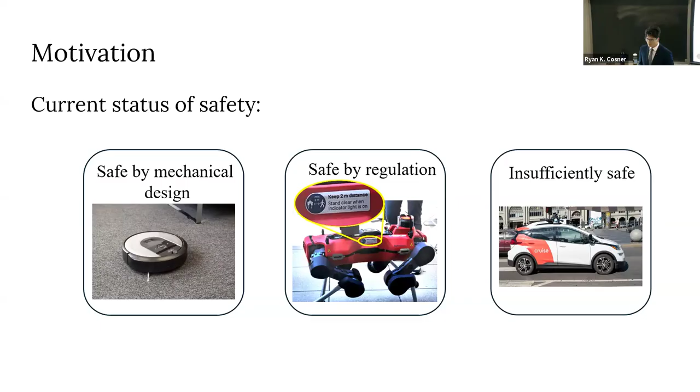These are our very performant robots, like our industrial robots. We don't see the robots building cars, they're behind fences in industrial manufacturing plants. So these are our two kind of ways industry has found to deploy robots at scale in a way that's safe. But this isn't necessarily what we want long term. I'd say these are kind of our training wheel approaches to achieve safety. It works, we get people on a bicycle, but they're not the full bicycle we ultimately want.

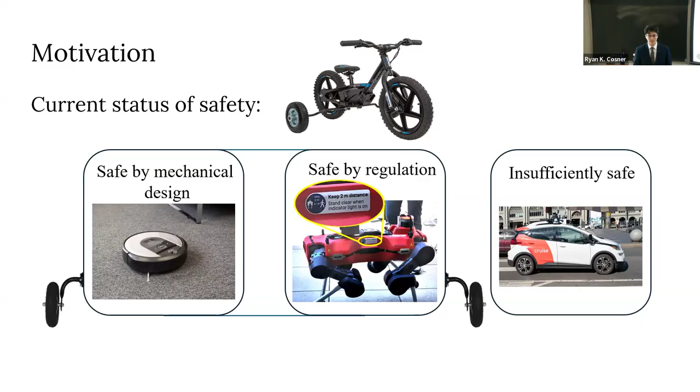The third category is the one we really don't want to be in, and these are systems that are insufficiently safe. The bar for safety obviously varies per system, and as an example, I'm going to focus on this autonomous vehicle scenario of Cruise. Cruise was an autonomous vehicle company deploying their robots, giving taxi rides in San Francisco, and they accidentally trapped a pedestrian under the car and dragged them across the street in a collision event. They were trying to be safe, pulled to the side of the road, but had trapped someone underneath the car and caused serious injury. Ultimately GM decided to shutter the company.

We really can't afford to have these things happen as we're deploying robots at scale. We hold robots to really high bars for safety. People get in car accidents all the time, but when an autonomous vehicle does it, because we hold robots to such a high bar, it can really affect the industry and general deployment. So we need to be really careful as we develop the performance of these systems to develop safety alongside it.

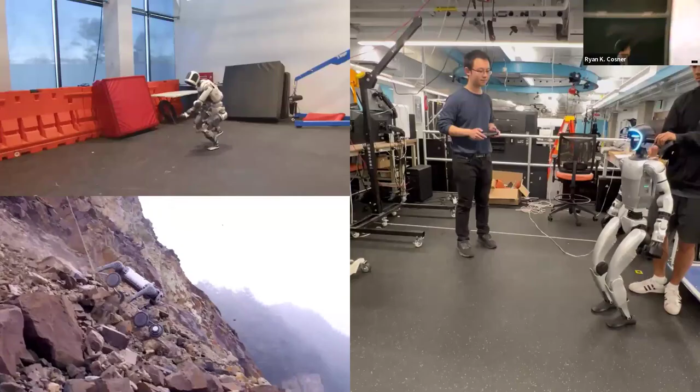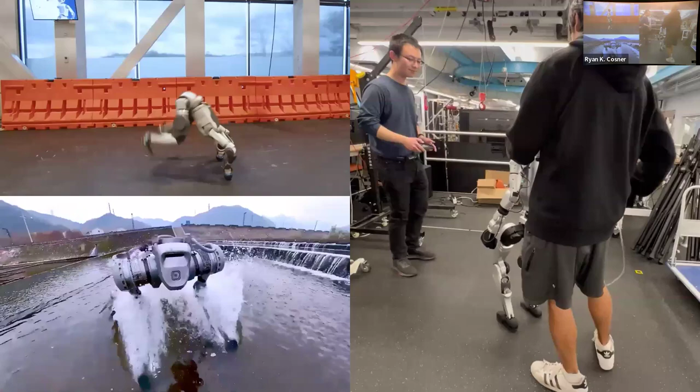Robot performance is going like crazy right now. Over the course of my PhD, we've developed some really insane capabilities in robotics. On the top left, this is Boston Dynamics and the AI Institute's new Atlas robot doing some pretty crazy dance moves. Bottom left, this is Unitree's quadruped doing some amazing locomotion with these wheel legs. And my favorite video of the three, on the right, this is Blake and Gary, who I believe are somewhere in the audience, members of the lab, who got this Unitree G1 humanoid on Friday and had it up and running like this on Sunday.

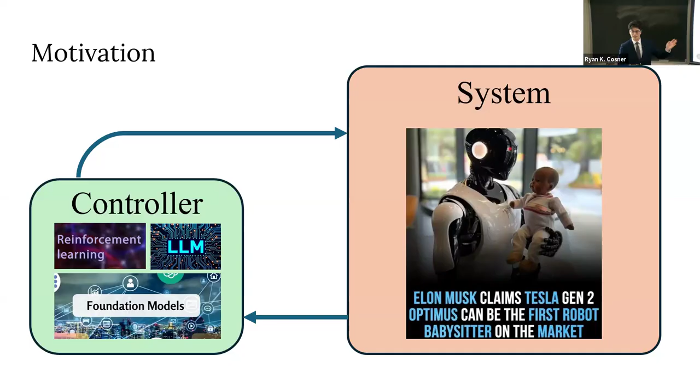So we're really developing amazing capabilities for robotics. This speaks to them as engineers, but also to our ability to get these systems up and running and deploying them. We're developing this performance really quickly, and we're moving towards this schema for how we're deploying these systems. We've got really complicated controllers, reinforcement learning, LLMs, VLAs, VLMs, foundation models. We're going crazy with all these things we can do, and then we're deploying it on systems in safety critical scenarios. Some folks in the industry want robots to be babysitters, and this, to me, is really concerning. We're holding robots to a really high standard of safety, but then we're trying to deploy these kind of black box algorithms onto robots in really safety critical scenarios.

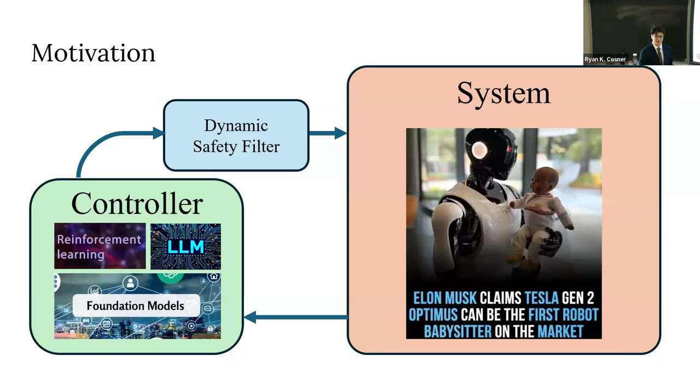So what I'm going to advocate for in the space that I like to work in is this idea of a dynamic safety filter. How can we come in between these complex controllers and the true system and make sure we get practical safety guarantees, practical deployable dynamic safety on our real world systems?

And we can move in between these by leveraging data-driven methods. And these are the three components of my work for the thesis: these deterministic guarantees, leveraging data to improve, and then winding up at risk-aware safety.

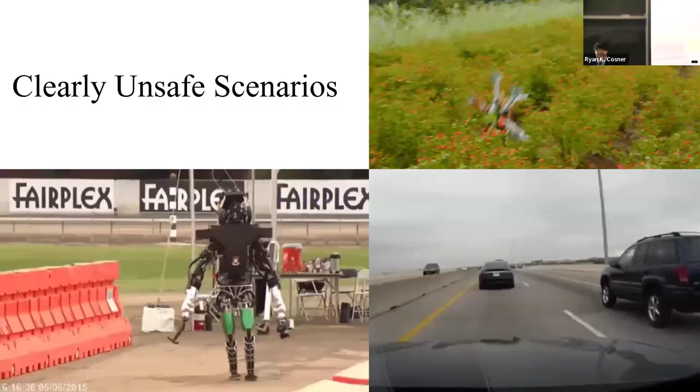And so we're going to start off with just trying to rigorously define safety. In order to guarantee it, we first have to have a mathematical description of it. And so when we, as humans, look at these scenarios, it's pretty clear to us that they're unsafe, right? But how do we encode that mathematically? What do we mean by safety?

So we're going to start with this example of an autonomous vehicle. And we're going to say that it has some state x. And x represents things like the position, velocity, orientation, angle rate, things like that. And then it has associated dynamics. So these are like our Euler-Lagrangian mechanics, or just F equals ma. This allows us to understand how the system will develop through time.

There's also a cool result that says this goes the other way. So this is a good characterization of safety because under some minor assumptions, you can start with safety and then get this h description of safety for our system. This is growing in popularity. When I looked a couple of days ago, since they came out as an idea, there's been nearly 5,000 publications, lots of conference sessions, workshops, and things like that.

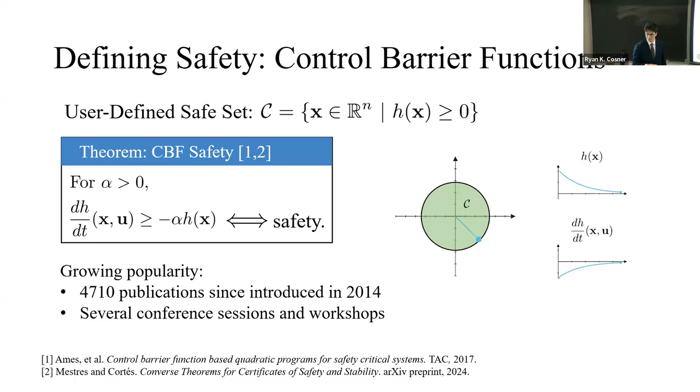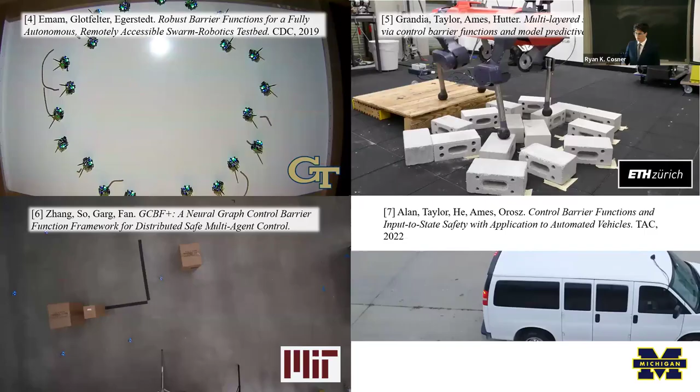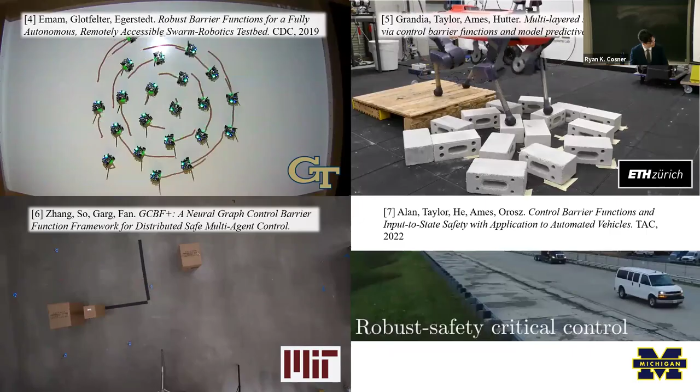So we've got a group at Georgia Tech, now UCI, Magnus Egerstedt's group, who put these on these mobile robots. Marco Hutter's group at ETH with the ANYmal quadruped, making sure we get safe foot placement for this quadruped here. Bottom left is Chuchu Fan's group at MIT, making sure that our quadrotor drones aren't colliding with each other or the obstacles in the environment. And then on the bottom right, Gabor Orosz's group at Michigan, making sure that these cars don't collide with each other. So a lot of people have been applying these.

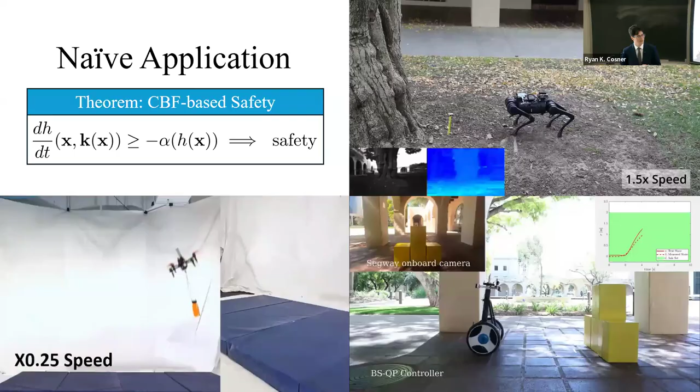My first year of graduate school, I was really excited. I had taken all these classes, I'd learned the theory, I'd seen these things deployed, so I was excited to go put them on robots. And these are my first applications of these things to robots. And we're not getting the safety that we want. So our drone falls to the ground, our systems hit their obstacles, and we're not achieving the safety that we thought we had from theory.

And okay, what happened? How do we get safety in the real world? And I would argue when I tried to apply these naively, I didn't satisfy the assumptions that I made in my theory. And in particular, I violated these three assumptions. One being, I assumed that I had a perfect understanding of my system model.

I assumed, two, that I had a perfect measurement of my system. And three, I assumed that I had a well-defined understanding of safety. So my safety definition was consistent with my system dynamics. In general, none of these things hold for real-world systems, so we need to look at ways to robustify against these sources of uncertainty. So to start, we're going to look at the perfect model case.

So in general, I don't have the perfect model for my system. And we're going to say that just for simplicity here, we have an additive disturbance, D, that comes in as a matched uncertainty to our input, and this is bounded by some value delta. And when we enforce safety nominally in this case, we get an expansion of our safe set. So we don't keep our original set safe, but now we have a slightly larger set, and that expansion is based on this value delta.

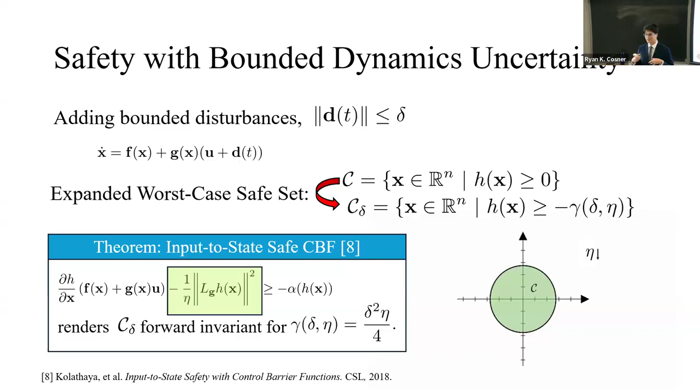But there are ways to counter this. And so if we add this tightening term, we can make sure that this expansion doesn't get too big. We can counteract it. And so on the bottom right, you see this set can expand, or as we make eta go down towards 0, we can recover almost the original set. So we can counteract the effect of these dynamics uncertainties. Okay, so that's a way to get around the first violated assumption. We can tighten this constraint a little bit to avoid having that error affect safety too much and to ameliorate it.

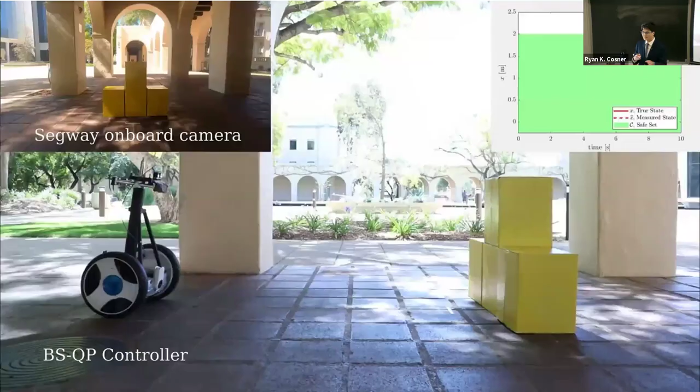Second, what if we don't know exactly where we are? So if we don't have the perfect understanding of our state, but we have some misunderstanding in where we think we are, this is what can happen. So I'm trying to use vision on board to make sure that the Segway doesn't hit the blocks, but the vision system is deviating from the true state. So on the top right, you see the true state is a solid line. The measured state is the dotted line, and they're deviating. And so we think we're keeping the measured state safe, but we're not actually doing that. So we end up with a safety violation. Our system hits the blocks.

And so we can get around that by doing the same thing we did before, where our true state and our measured state, we're going to assume has some bounded difference between them. So now there's this epsilon term, and we're going to take a similar approach, where we're going to tighten our safety constraint. This involves a bunch of Lipschitz constants. It turns into a second-order cone program here. But we're going to tighten this constraint, and what that allows us to do is pick a single input that ensures safety for every possible true state within this uncertainty ball.

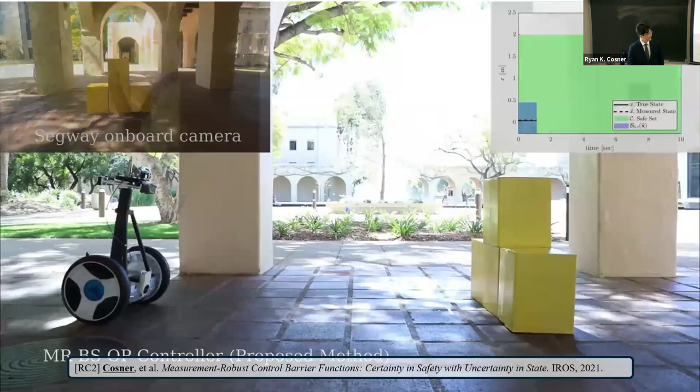So if our measured state x hat is this one here, and our true state is within some radius epsilon, then this constraint allows us to pick a single input that keeps the whole uncertainty ball safe. And we deploy that on hardware. And since our solid line doesn't exit this blue region around the dotted line, we have a valid safety guarantee to make sure we don't hit the blocks. And this is essentially just shrinking our safe set, but it's doing it in every dimension. So our position, velocity, pitch rate, and things like that. Okay, so that's a way we can get around measurement uncertainty.

And then finally, I want to talk about this well-defined safety idea. And this one's a little more complicated. It has to do with the fact that starting with the joints of the system to define safety can be kind of complicated. This ends up being like a reachability problem. It can be really hard to solve. And essentially, it's that if I don't want to hit the door, how do I need to actuate my legs in order to not hit it? Like that can be kind of complicated to describe. But if I don't want to hit the door and I can just actuate my velocity, that's a lot easier to describe. I just need to slow down as I get close to it.

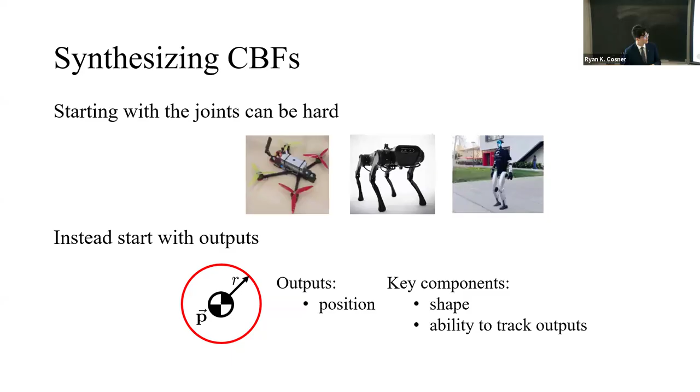And so using that kind of idea, we're going to start with describing safety in terms of outputs. So instead of starting at the joints and the bottom up, we're going to kind of go from the top down and start with the system position and then key components like the shape and its ability to track these outputs. So in that way, we can just describe each of these systems as their outputs and their associated shape.

This borrows a lot from this hierarchical understanding of controllers for robotic systems, which is a really common paradigm. If you were at Dr. Knoll's talk yesterday, you got a good understanding of this, but I'm taking the same approach here where we have 2 layers and then a real world system. The reduced order planner up top is going to provide some sort of reference command, or it could just be me with joysticks. And then the tracking controller is going to try to follow that reference.

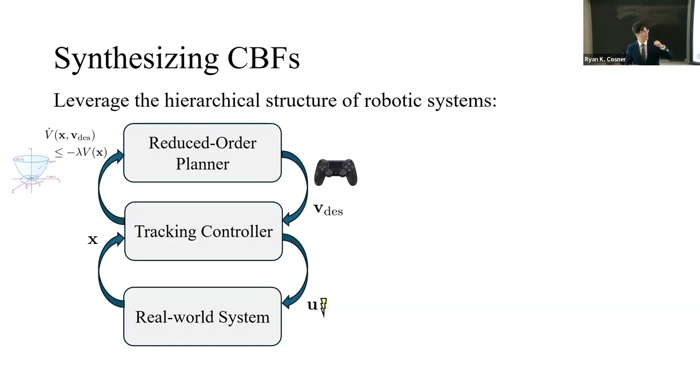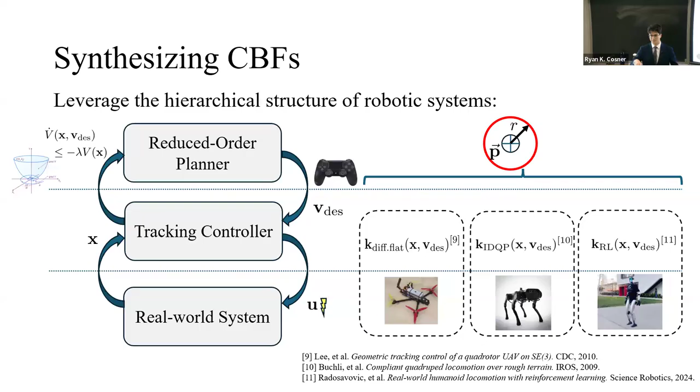And it's going to do that by actuating on the real world system, applying torques or voltages or whatnot. The real world system then moves in its state. The tracking controller uses that state to try to track it and provides some guarantee of tracking up to the reduced order planner, codified here as this Lyapunov convergence. And the systems we're going to work with have this kind of structure. So I've got my real world system on the bottom, an associated tracking controller that allows us to simplify our system down to its outputs and its associated shape.

So we describe safety for these 2 systems in the exact same way in terms of its safety requirements. So we're saying, don't enter these circle regions around the columns. And this is allowing us to achieve safety for both the quadruped and the quadrotor drone. And the key idea behind this is that we start with a safety requirement that's easy for us to describe. And this might be our center of mass position needs to stay away from the obstacles in our environment. And then we're going to subtract off a tracking metric. And this is going to describe safety for the full system.

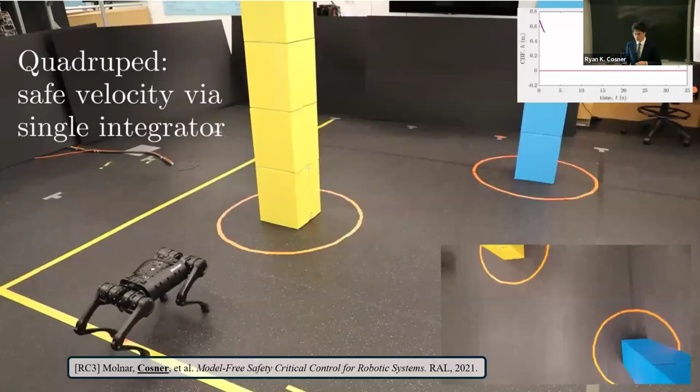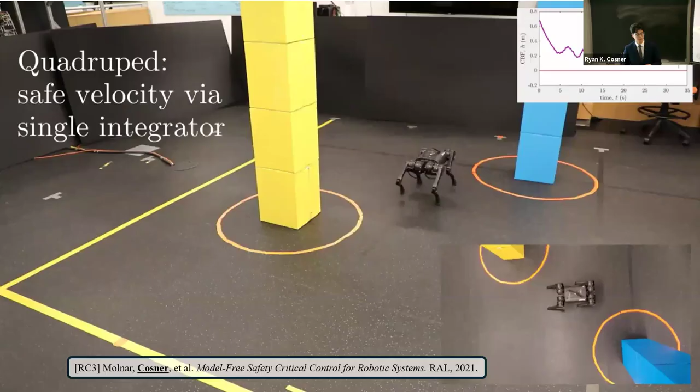And this is a really rich idea. We've published a bunch of papers that really play with this theme, either starting with an unknown tracking controller or building it up through methods like backstepping or things like that. So just one more time to look at this. I describe the safety of this robot based on its output, so its position, and then choose safe velocities, which are then tracked by a locomotion controller to move it across the room and avoid entering these unsafe regions.

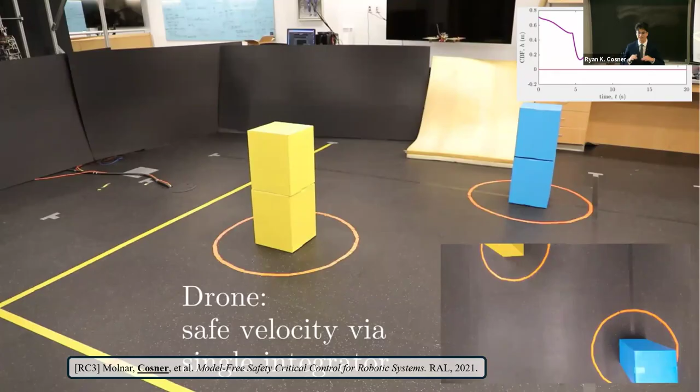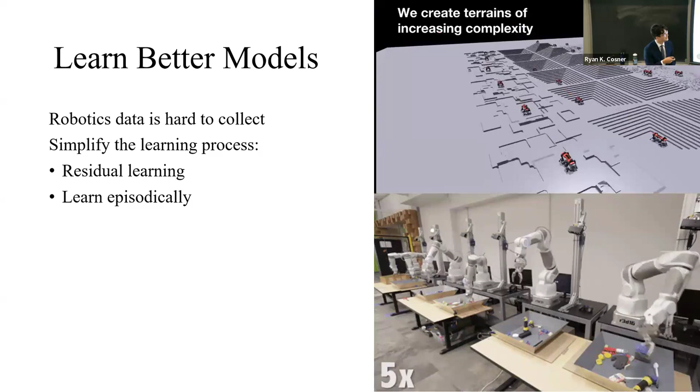But why can't we just reduce how much robustness we need? So in this case, we might want to just learn better models. Well, part of the tricky thing here is robotics data can be hard to collect. Like, you generally have to run a robot. Well, some people have gotten around that by doing massive simulations. So this is becoming a common approach. This is, again, Marco Hutter's group. And they're training this quadrupedal robot to walk by just simulating it tons and tons of times. So that's one approach. The other one is to just buy a bunch of robots. So that's what's happening on the bottom.

So then you can collect a bunch of data that way. But this isn't necessarily possible for all systems. Like the Mars rover or our human interactive robots, we don't necessarily have good ways of simulating them, and it might be dangerous or expensive to collect this data.

And so what I've often done in my approaches to learning for robots is residual learning. So instead of just trying to learn the whole model of the system, we have all of this nicely constructed, well-studied understandings of dynamics from control, robotics, nonlinear dynamics, things like that. Let's use that and then just learn the residual. So we can use our theoretical model to help us extrapolate and interpolate, and then just fine tune with our learned residual. The other thing we're going to do is we're going to learn episodically.

And we're going to roll it out once, collect the data, retrain, and then roll it out again, and keep doing that until we get safe behavior. If we tried to robustify for this problem, it just wouldn't take a step forward, right? It needs to be able to walk across the stones in a way that counteracts for the uncertainty, not just stays robust to it. We're going to enforce safety for these stones by having one barrier function that pushes the foot forward and one that pushes it back.

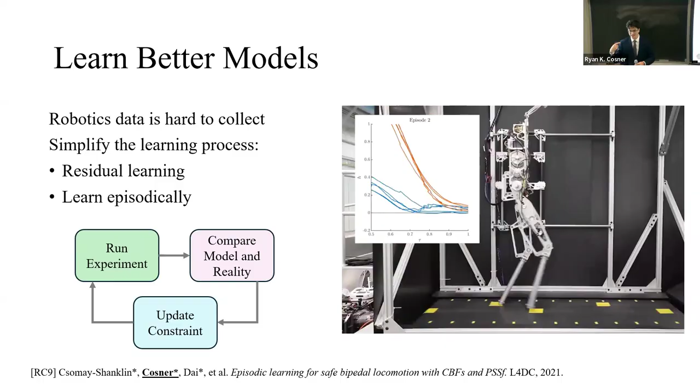We do this one more time, and now we've identified this uncertainty and are really going to have to kick our system to really get its feet onto those stepping stones, and we're able to successfully circumnavigate this treadmill here. So just one more time. Oh, sorry.

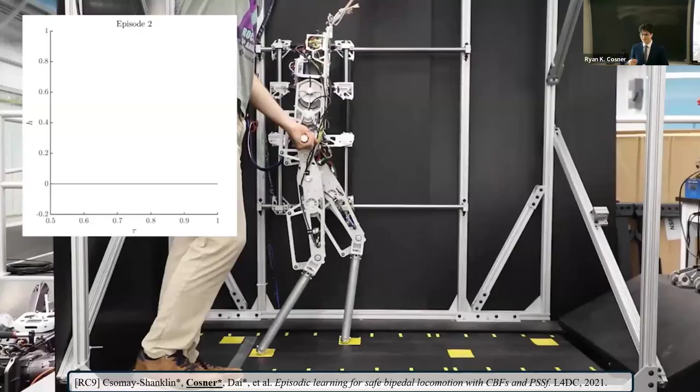So the first trial here, we are just using our nominal model. There's a lot of uncertainty associated with this nominal model coming from motor viscosities, friction, contact forces, things like that we can't model perfectly. So we collect that data, train to try to understand the uncertainty, now apply our controller that counteracts for that uncertainty by directly canceling it. And we do better, but we still don't make it all the way around. Collect that data, apply it one more time, and are able to successfully complete this task.

But in order to do that, we really have to kick it. So it gets this weird walking because it's not the nicest gait that it has to follow, but it has to really kick its feet to get across. Okay, so that worked nicely there, and I wanted to apply it to another interesting problem. Here we have a drone with a flexible cable tied to it and a water bottle attached to the bottom. That drone is here, if you're interested.

So in this case, I'm going to say that safety is don't let the bottle hit the ground. So I'm going to assume I know the length of the cable and the payload, but I don't know the bottle state or the mass of the bottle. And I'm going to try to learn the effect of the disturbance. I'm going to try to learn the disturbance given the drone state. So I have a motion capture system and an IMU that can identify the state of the drone, but I have no idea what the water bottle is doing.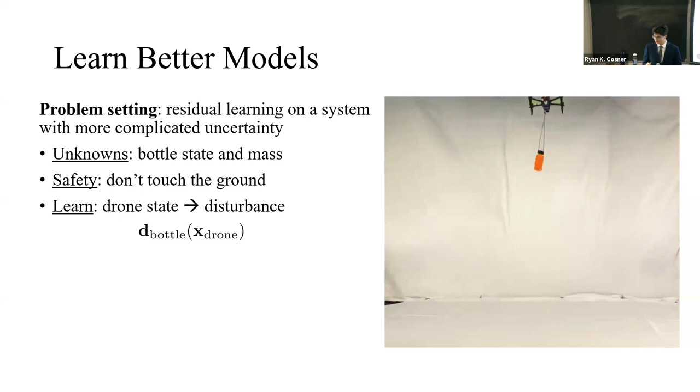But if I move to the side, I have a small safety violation there. I don't quite achieve the safety that I wanted. As I move elsewhere, the same behavior happens. I do okay, but I scuff the floor, which is violating safety as I defined it for the system.

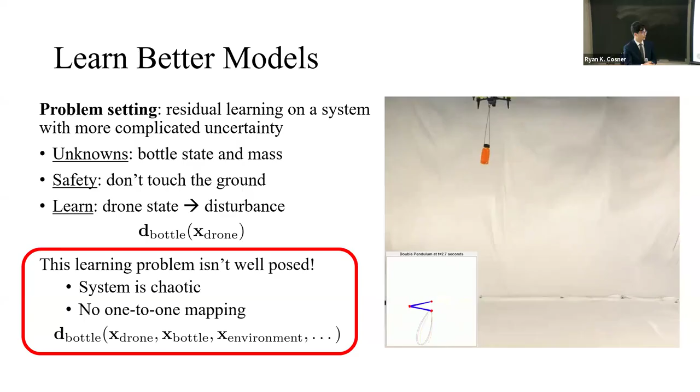What happened here? I would argue this happened because this learning problem isn't well posed. There's not a one-to-one mapping between the drone state and the disturbance generated by the water bottle. Beyond that, the system's chaotic, so even if we could measure everything, it would be really hard to predict. There's no one-to-one mapping, so we really need a lot more information to predict what this disturbance is.

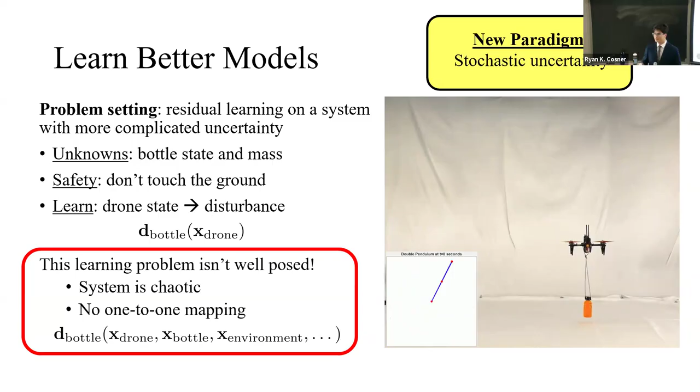This motivated me to switch paradigms. We've been using this deterministic paradigm where I should be able to predict everything, but really I can't predict everything here. There's a distribution of what the effect of the water bottle could be given the state of the drone. This is going to shift us to a stochastic perspective: what's the distribution of this disturbance that I could be experiencing?

That brings me to this third section. If we're shifting paradigms, we now have to develop totally different guarantees. So that's what we're going to start off with.

This paradigm shift moves us from continuous time, this x dot equals f of x plus g of x u, to a discrete time version of our system. There's a nuance to how stochastic differential equations and sample data systems play with each other—they don't work very well together. So we're switching to this discrete time model to better represent the stochasticity for robotics, since it better captures uncertainty for robotic systems.

We're going to switch from this decay time derivative constraint to a decay constraint in discrete time. I'm going to propose that we use this expectation-based decay constraint. There are a bunch of different ones you could use—a quantile-based constraint, a CVAR constraint, things like that—but I'm going to use this one, and I'll get into exactly why in the next slide.

Then we're going to change our safety goal. Instead of enforcing 100% guarantees of forward invariance of our safe set, we're going to switch to trying to achieve bounded risk of failure over a finite horizon.

The reason I want to use this expectation-based constraint is, one, because it's natural—if you aren't considering the stochasticity, you just remove the expectation and that's your discrete time constraint. But if you are considering the stochasticity and use this expectation, there's now a one-to-one mapping between this discrete time control barrier function and a super martingale.

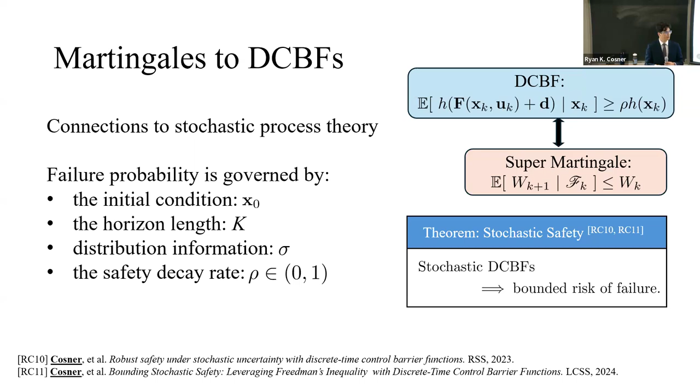So great, we've got some nice theory. How do we practically enforce this on our system? We start with this nice theoretical constraint that's easier to understand. We've got this expectation of safety with our dynamics in it. But how do we actually apply this in practice? Well, it's a little tricky because this expectation is on the outside of everything, and our uncertainty is coming through our disturbance D. So we're going to try to move our expectation onto that.

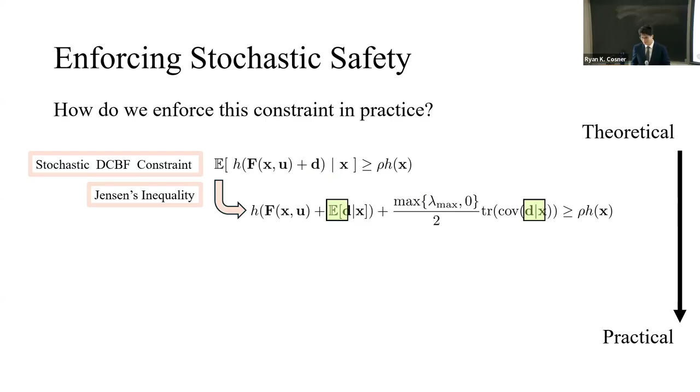Here we're going to leverage Jensen's inequality, in the case where I have a bounded Hessian for our safety function h, and it's concave. There's different things that happen with different types of concavity or convexity, but in the concave case it looks like this. We get an expectation on the disturbance, and we also need the covariance of that disturbance. I'm going to suggest that we learn these components through generative modeling, trying to learn the distribution of the uncertainty.

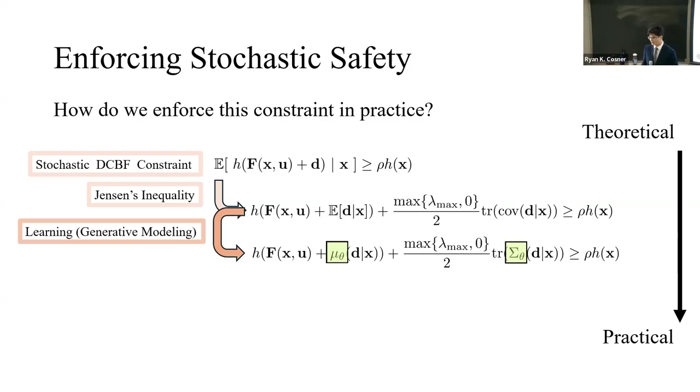The last thing here is we have this complicated dynamic - a discrete time dynamics update that can be complicated with respect to our input and hard to optimize through. A cool result that Andrew Taylor, Victor Dorobantu, and I found is that if you use the appropriate Runge-Kutta approximation, this can be a linear approximation of your dynamics, and you can still get good guarantees of safety for the simplified model for the sample data system.

Okay, so now we've moved from something that was nice looking and theoretical to something that looks a little more complicated, but is practically enforceable. Each one of these things I can evaluate, and if our function h is concave, this is now a convex constraint, which we can enforce on hardware. And so we did that.

This is our online risk-informed optimization controller. It's a bit of a backronym - we wanted it to be Oriole because it's a drone that flies at Caltech, so we wanted an orange bird. But we were tired and couldn't come up with the last two letters, so we wound up with ORIO.

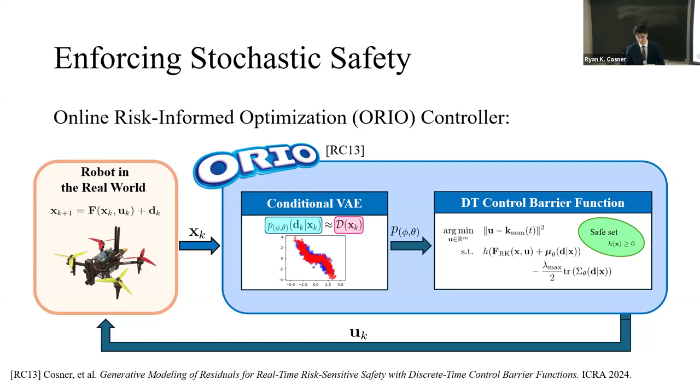This combines a conditional variational autoencoder for our generative model with our discrete time control barrier functions to enforce safety. Applying back to our same problem as before, we're flying the drone up, letting it drop. Now we've trained our generative model on data we've collected to capture the distribution of this uncertainty, and we get nice safety behavior. We're no longer scuffing the ground, but falling towards it, remaining robust to the uncertainties generated by the swinging water bottle.

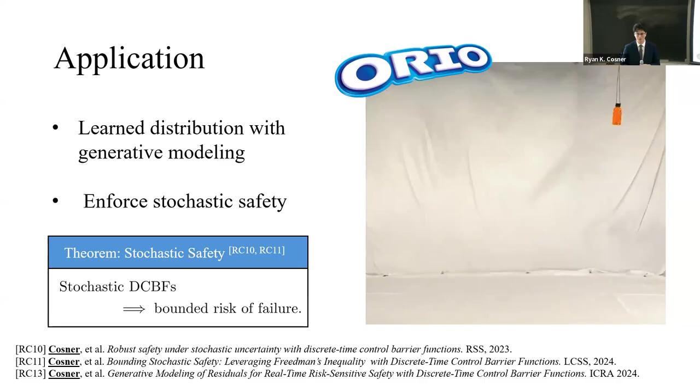I would say that we get these stochastic guarantees, but that does require additional assumptions on those approximations we made to get it to apply, and also that the generative model is perfectly accurate. But assuming those things, then we get those guarantees that we had before.

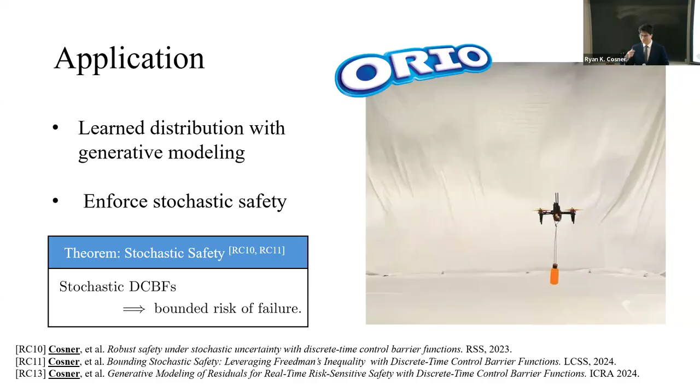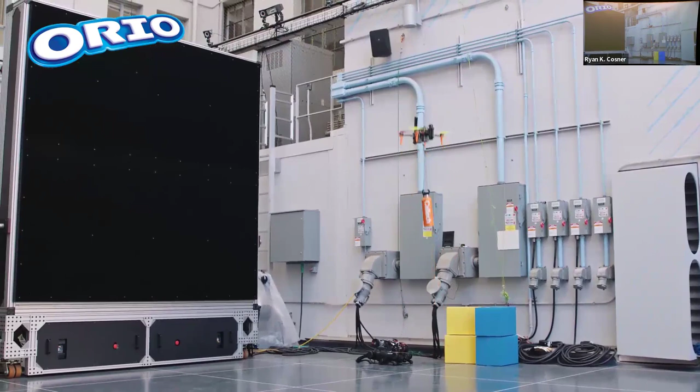And this worked really well on our hardware here. So we took it out, used it as a demo, took it into a new environment, retrained it, switched the water bottle out. There's Dr. Ames in the corner - this was a talk we did for folks visiting Caltech, so there's a whole audience where the camera is, where y'all are sitting. I was getting more confident with the system, so I'm really pushing it. We're getting some really cool flight behavior here.

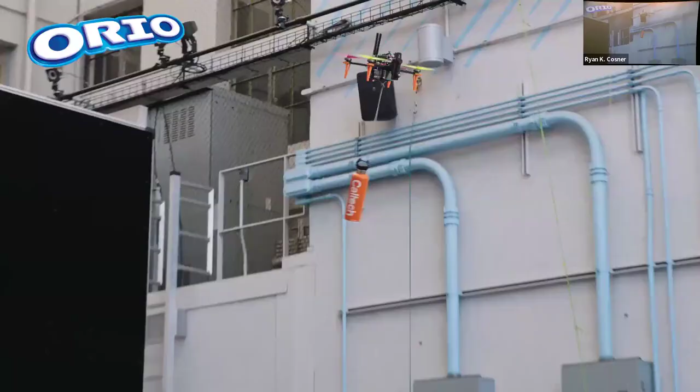Okay, so that worked really well for us, and we wanted to apply it to a different robot. This was a successful demonstration - let's see if we can generalize to other systems. Just to warn you, this is an even worse backronym than ORIO was. This is Safety on Humanoids via CBFs in Expectation on Learned Dynamics, and yes, that's SHIELD. So it's a cool name - the backronym doesn't quite work, but it's a really cool application of this idea.

And so for the drone, we just tried to learn the effect of the water bottle on the dynamics, and then we can compensate for that by changing the actuation.

For this walking robot, we shifted that mentality a little bit. Now the system we're considering is the coupled robot plus the reinforcement learned locomotion controller. The inputs we apply to the system are just reference commands. We modulate those reference commands to get good safety behavior. This takes from the hierarchical approach we heard about from Noel yesterday, separating the safety requirement and the tracking metric.

So we're going to regulate those reference commands instead of directly regulating the joint inputs. This required a shift. We couldn't just condition on the single previous state. We now have to condition on the history of states and inputs to capture the higher order uncertainties in the system. What we found that was cool, that extended beyond ORIO, is we could use this learned model of the dynamics residual to also improve tracking. So we're going to improve both tracking and safety using this setup.

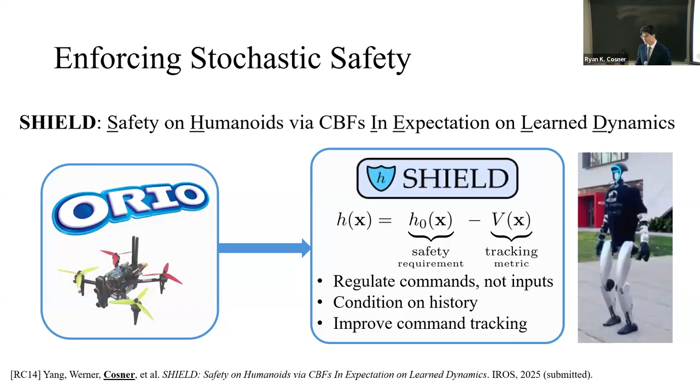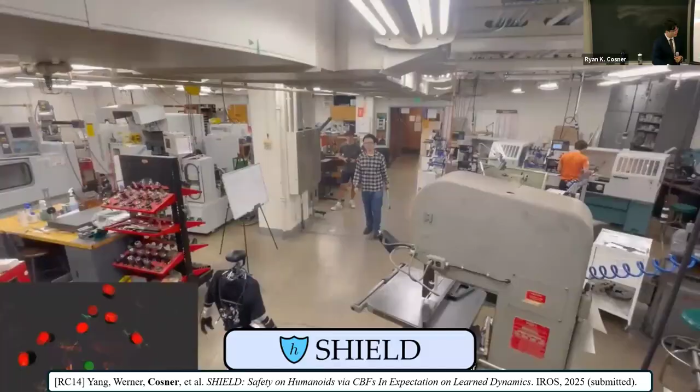And we put this on our system. The robot's either going to try to walk forward or stand still and avoid the people in the environment. You can see it's building its map of the environment on the bottom left, with all these red things being obstacles it's trying to avoid. It's going to slide around Gary here, not collide with him, in this nicely unstructured, kind of messy machine shop.

The same thing's happening here, where we are learning the difference between the full order system with its RL locomotion controller and our reference commands. So that worked nicely. We now have two applications of this idea of applying these stochastic safety methods to practical systems. But these weren't particularly dynamic safety, right? The drone was moving quickly, but its safety constraint was don't hit the ground, and the ground's not really moving, not super dynamic. The humanoid also wasn't a super dynamic safety behavior. And so we wanted to push that dynamic component.

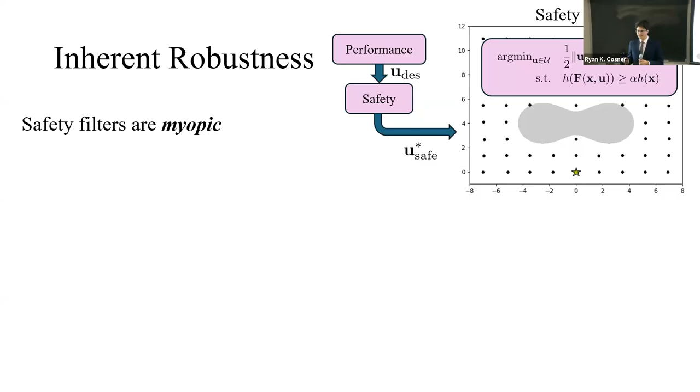In doing that, we had to overcome this problem that safety filters are inherently myopic. The approach we've been taking previously is that we have a performant controller that's going to get us to our goal, then we're going to modify it in order to achieve safety. That's our safety filter that you see up there. And this can cause some problems in its practical application.

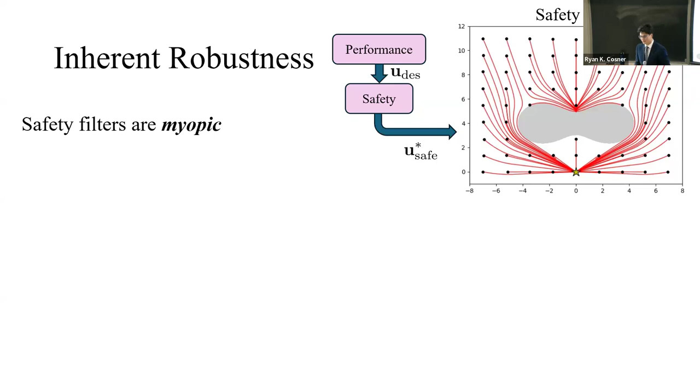And that can look like this. Each of these black dots, if it just obeyed the regular controller, would get to the goal star at the bottom. But we're then enforcing safety that says don't enter our peanut, you need to not hit it. Because we're enforcing safety in a way that isn't aware of the performance, and the performance isn't aware of the safety, we wind up with these stable equilibrium points that are marginally safe, like right on the boundary at the top center of that peanut there. This can cause really big problems for the practical application of safety.

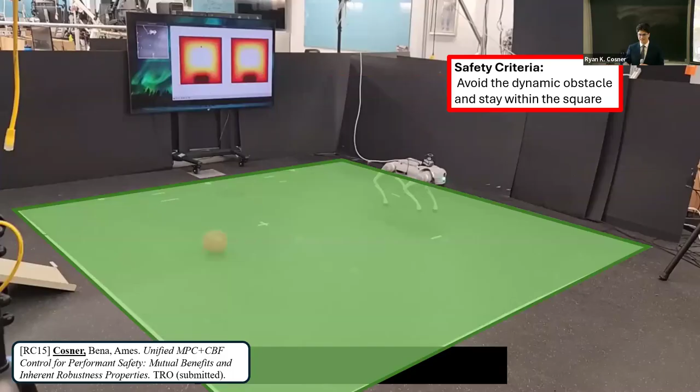And we see that here in this demonstration. We've got a quadrupedal robot that's trying to avoid getting hit by this dodgeball that we're going to roll towards it. It also has to stay inside of this square, and you can see that definition back there. So what happens is the ball rolls towards it, it backs up towards the wall, it's like oh no, I'm going to hit the wall, I move towards the ball. And because it's not planning for performance, it gets stuck there.

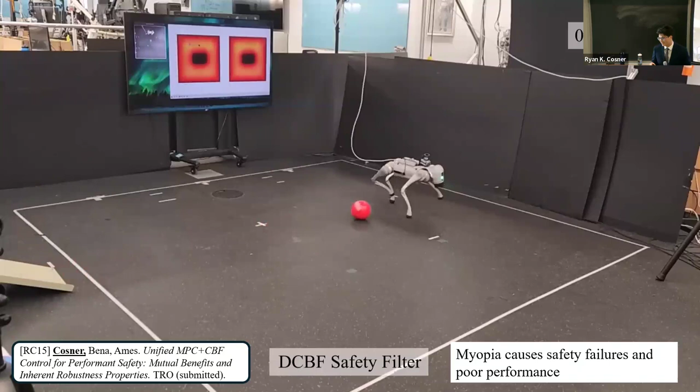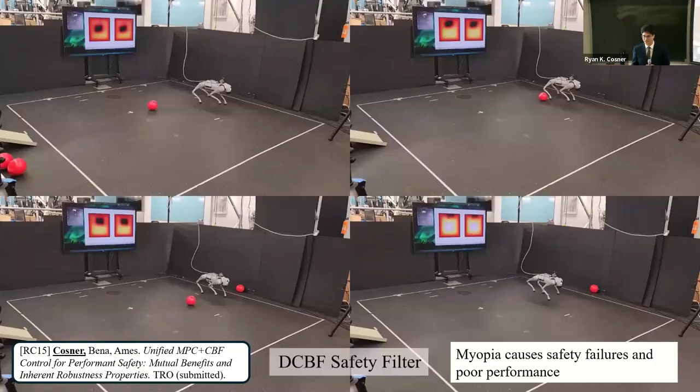It has no understanding of what's going to happen over a time horizon. It's just myopically moving back and forth between these two potential violations of safety. We see that happening pretty repeatedly if we try to run these with dynamic environments. We get towards this marginal position in safety, we get bounced back and forth, and then we get squeezed into an unsafe position. And so planning can help with this.

This is probably really obvious to roboticists in the room - you probably should be looking at horizon understanding in order to get performance. So we're going to adopt a method from model predictive control where we can optimize for performance while enforcing a safety constraint. And this gives us much better behavior. At the top, again, we are trying to get to the goal, but we're going to wind up getting stuck at that point up top for a lot of the trajectories.

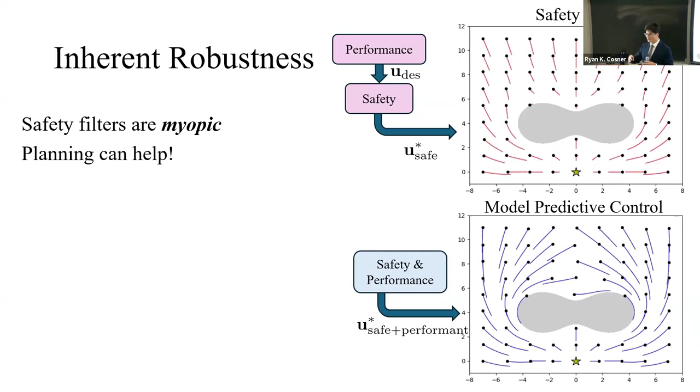At the bottom, we have all of our initial conditions flowing around this peanut obstacle, getting to our goal location. So now we're able to achieve safety. We're not hitting the peanut, but we're also able to achieve performance with everybody getting towards the star.

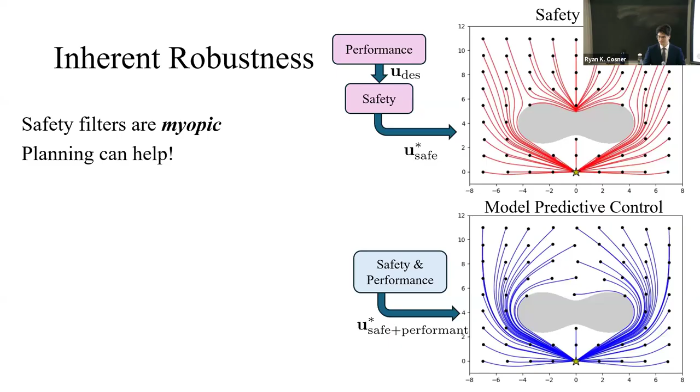Now when I adopt a model predictive control framework for safety and performance, the immediate question a lot of people have asked is, why are you enforcing a discrete time control barrier function constraint instead of a state constraint? The planner can enforce this just as well—just make sure your state stays above 0 along the plan and you'll be okay.

My argument for this is this rho term is super important. This decay constraint is what gave us our stochastic robustness before. It gives us a lot of really nice inherent robustness properties to this controller. So we're going to compare these two with rho equals 0 or rho strictly greater than 0.

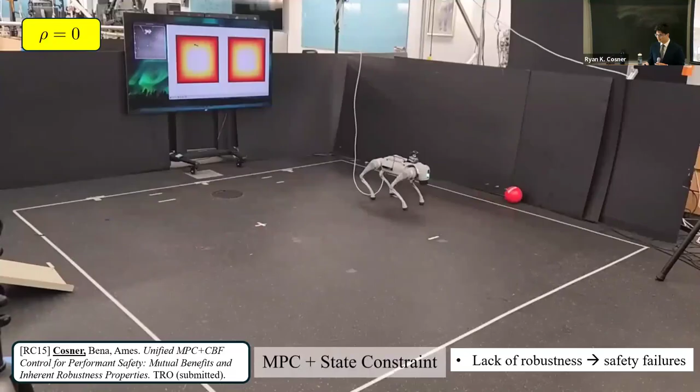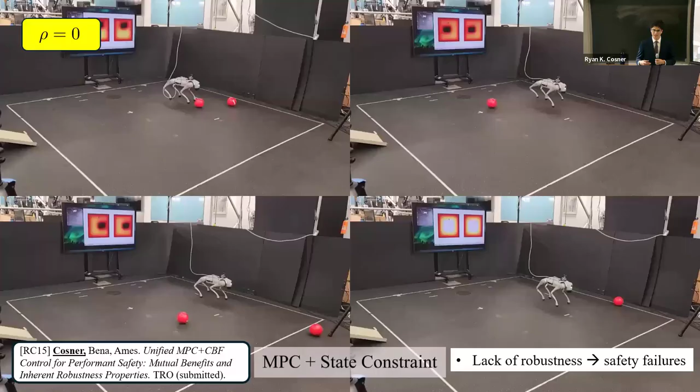If rho is equal to 0, we don't have this additional robustness, and we end up getting hit by our ball here because we plan to move backwards, and we're going to try to move backwards. But with all the uncertainties in this system, we don't do it fast enough. We're not robust. We end up getting hit. And this happens across the board. This was really repeatable—there's not enough robustness for this system if we just apply a standard state constraint.

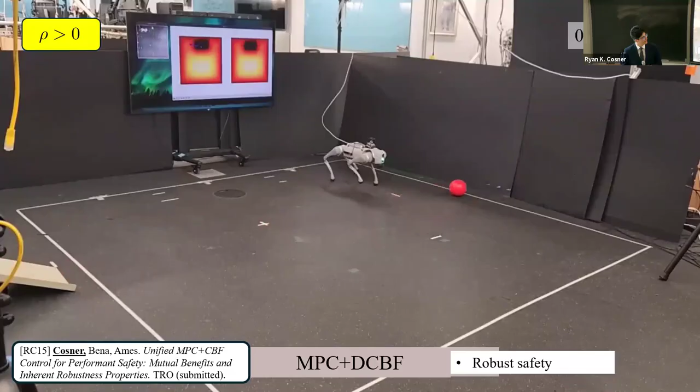Alternatively, if we have a value of rho greater than 0, we add robustness to the system and we get this really nice performant behavior. We move out of the way, avoid getting hit by the ball, and then return nicely to our goal position. And similarly, this worked for a bunch of different applications super repeatably.

Okay, so we wanted to do that also on our quadrotor drone. We have this nice dodgeball setup. So instead of rolling it, I'm now going to throw it. We're going to try to avoid the ball that I'm throwing and avoid hitting the ground.

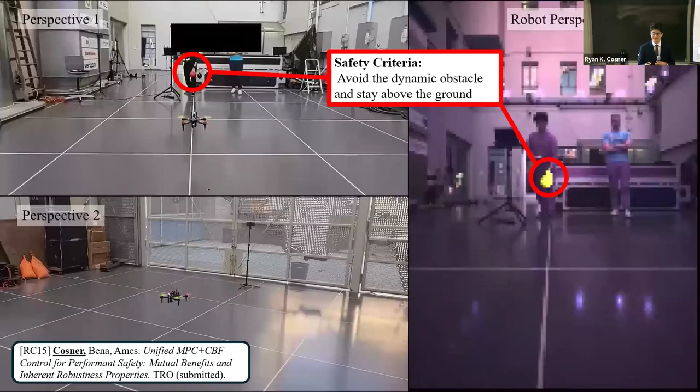On the left, you see two third-person perspective cameras, and on the right, you see the onboard camera—this is the actual frame rate it's using, running at about 11 to 12 hertz. It's segmenting using a distillation of Facebook's Segment Anything model, and all of this is running onboard on a Jetson Orin.

It's using an RGBD camera to get an understanding of where it is in space, segment that, use that to get the measurements for a Kalman filter, estimate the state of the drone in the Kalman filter, and then run our model predictive CBF controller to enforce safety. What's really cool is if you enforce safety on the Kalman filter belief state, then naturally you enforce this expectation CBF constraint on the system.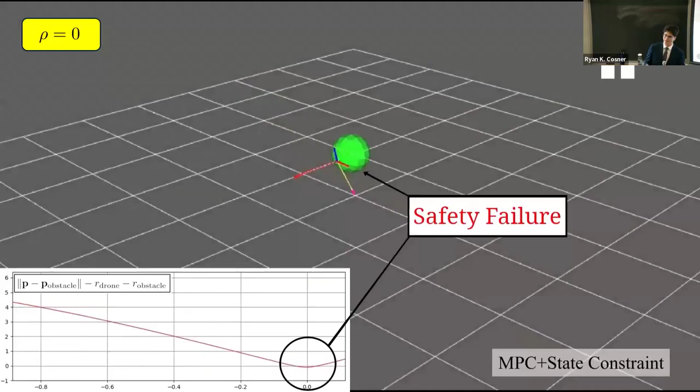Similarly, when we apply our state constraint model predictive control because we try to get out of the way, but it's not robust enough and we end up getting hit. But our MPC with the CBF tightening really nicely has this avoidance maneuver.

And we saw that again on hardware. So I like watching the right-hand side because that's really what it's getting—it's getting like 4 or 5 frames to estimate the ball and plan and move. And it's getting out of the way here.

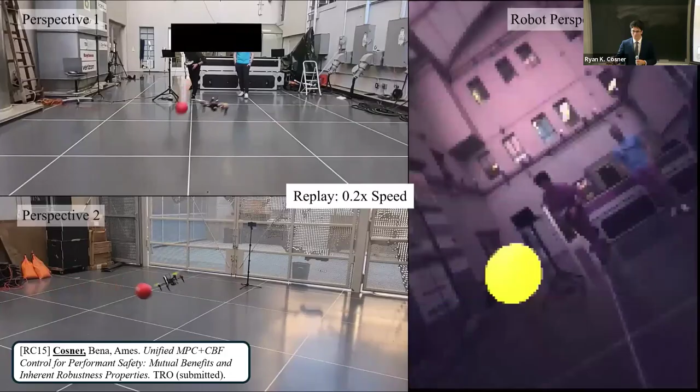I'm also particularly proud of this because we started with those quadruped videos at like 8x speed, and now we're down to 0.2x. So I've really pushed from not dynamic safety, conservative safety, all the way to dynamic safety here, getting really quick motions in order to ensure safety for the system.

We're tossing the ball at around 6 meters per second. I did a couple of tests where I had OptiTrack markers on it that aren't shown here, so we can get ground truth information. So I'm about a 6 meter per second dodgeball thrower.

What's the frequency of the system? 11 to 12 hertz. Yeah. So that was our big bottleneck, was running the segmentation fast enough. But because we're running this fancy segmenter, we can also toss other obstacles. So this is a Mario Kart green turtle shell that it's trying to avoid.

And you can see the uncertainty in the vision map, like it snapped over to my hands at the end of the test there. But we're getting this nice dynamic safety where we're avoiding in a way that I had to slow the video down to interpret. Okay, so that was my work here on the center 3 components of dynamic safety under uncertainty.

And so now we get to look at some fun stuff of the takeaways and future work. So the way I structured this is we have takeaways on one side, and that leads me to future work and things that I'd like to continue from there. So 1, I found in the course of my PhD that conservative guarantees are still useful. Like, even though our robot didn't move when we tried to enforce all this robustness, that's okay, because it pointed us towards the knobs that we can tune to get the robustness we need.

On one side, we might be performant if we turn the knob to 11, but we might be unsafe. And on the other side, if we turn the knob to 0, we might be super safe but incapable. And so there's some balance there in the middle that we want to identify, and that can allow us to achieve safety in this kind of interpretable way because we've identified these parameters.

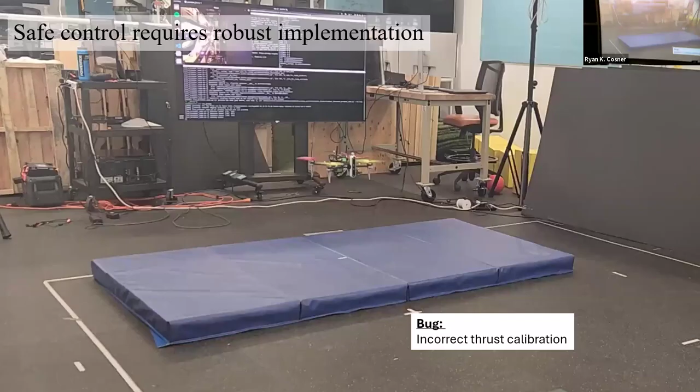So when I talk about the drone, I often think of it as 4 unhoused blenders attached to a chemical bomb. Because those rotors are pretty sharp, and the LiPo battery, if it breaks, it'll catch on fire, and you just have to wait.

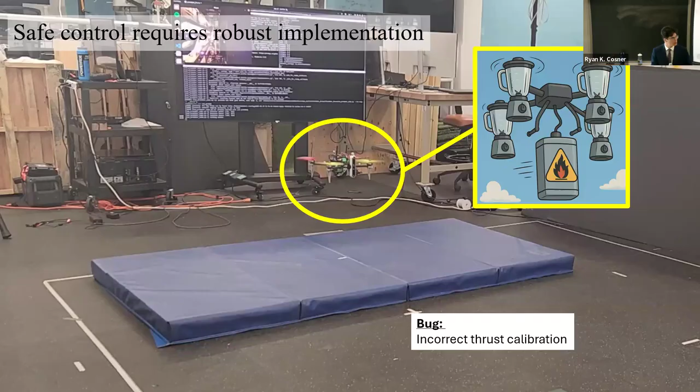So this is not a safe system. The drone and I have a mutual respect for each other. And in this case, I'm running a safe controller, quote unquote, robustly safe controller, but I have a bug where my thrust calibration is wrong. And that's going to cause some problems.

So there's volume for this. I don't think it's too loud, but it's fun to hear. Sounds like R2-D2. So it tries to get out of the way of the ball. It's getting way more thrust than it asks for, and hits the roof, hits e-stops, falls to the ground.

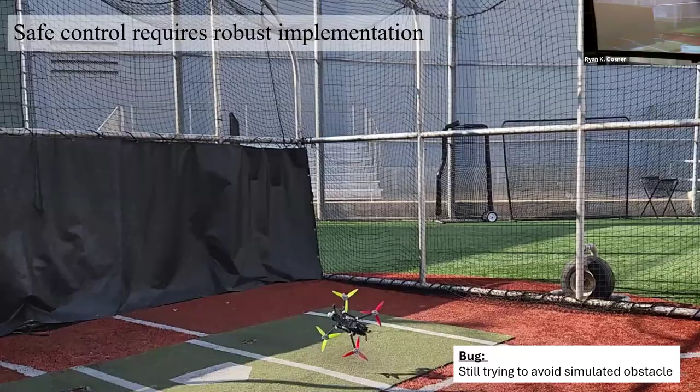Similarly here, we're running our system, forgot to remove the simulated obstacle. And so it's like, oh, there's an obstacle in front of me that's only in code. Hits the roof, gets caught, hits the e-stops, falls to the ground. This one was the craziest one. This one took me like a day or 2 to figure out.

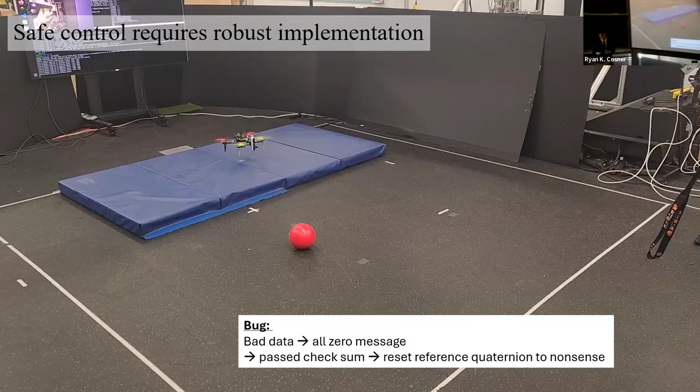So it's been working fine for like 10 minutes of flight, and then a bad message of data resulted in a message that was all zeros, which passes a checksum because the sum of 0 is 0, and that reset the reference quaternion. The reference quaternion got normalized from 0 to garbage, and then it's trying to track garbage, and out of nowhere, it just whoop.

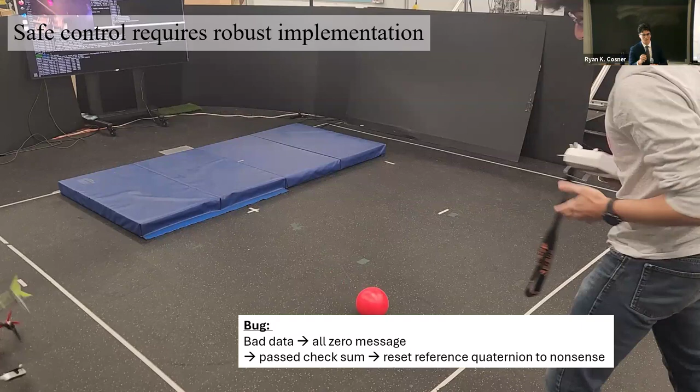Oh, and then watch my face on the top right. So I wanted to catch it, and that split second, I really, really wanted to catch it, and then I remembered it was a blender.

So I really think that as we build safety for these systems, it's been great to work on these safe controllers, and it's really nice, especially in this lab, to be able to work on that component of the system. But as we build safe systems, we really need to think about it from the ground up. I should not be building both that and the low-level controller, because clearly I built some bugs into it. But we really need to be thinking about how safety manifests in the whole stack.

And so just kind of the thesis statement, I suppose, of this is robust safety guarantees provide a structured framework that can be enhanced by data-driven and planning-based methods to achieve dynamic safety under uncertainty. And my contributions to this thesis are robust safety methods with worst-case assumptions, learning and planning-based methods to improve performance, and risk-based safety with practical enforcement methods.